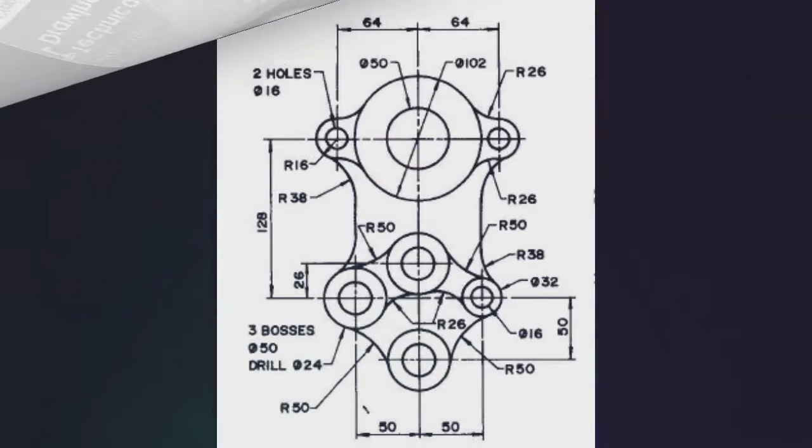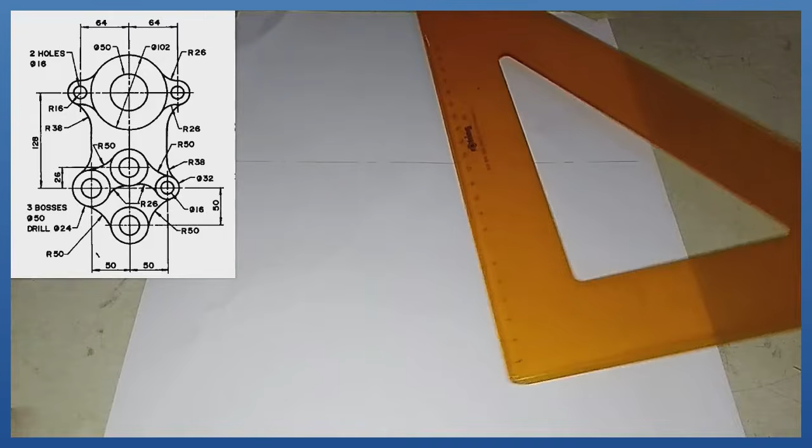Okay, so for this question, the very first thing I'm going to produce is this center line in this manner. Okay, so after producing that center line, I'm going to produce a vertical line, using the center line also. I'm going to produce that on it in this manner.

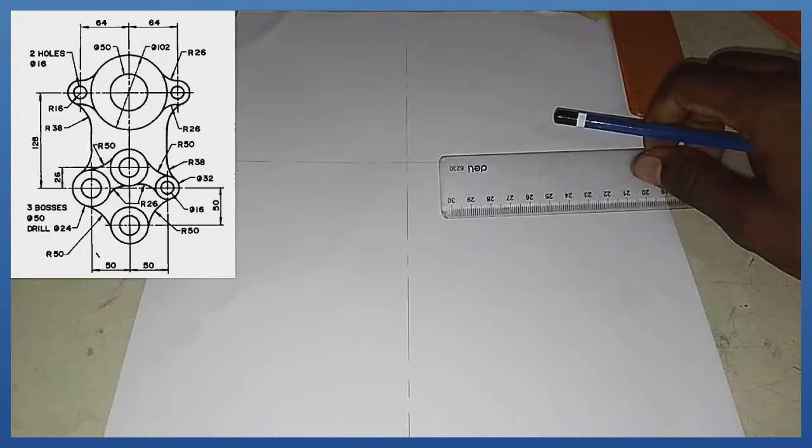Okay, after doing that, if we take note of the question on the screen, the first circle there is a circle of diameter 102, and that is radius what? Radius 51. So with radius 51 on my compass, that bigger circle, standing on this midpoint, I'm going to produce my first circle, which is this.

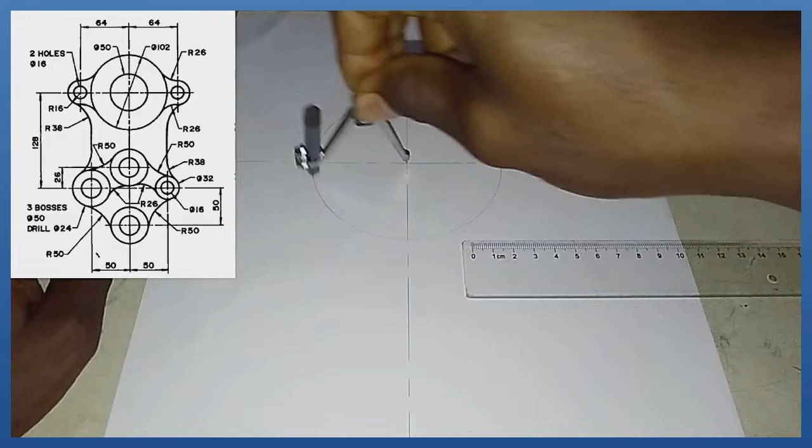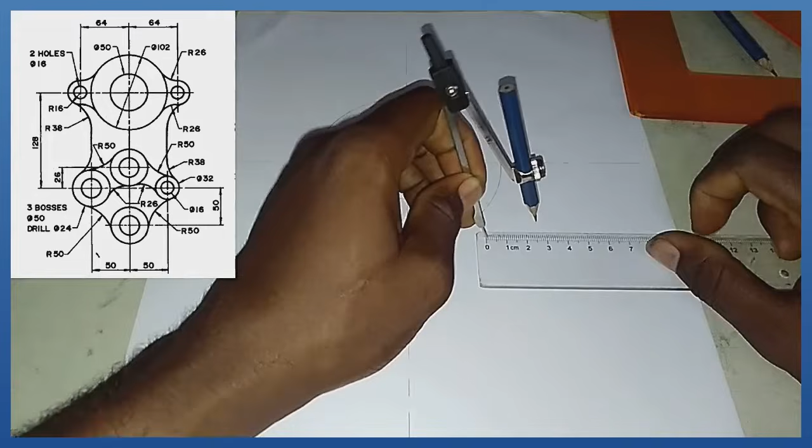Then the circle sitting inside of it is diameter 50, which is radius 25. So with radius 25, I produce this second circle right here. From the midpoint of our circle towards the left hand side and right hand side, we have a mark of length 64. So with my compass measuring 64, standing on this main point, I strike an arc like this and like this.

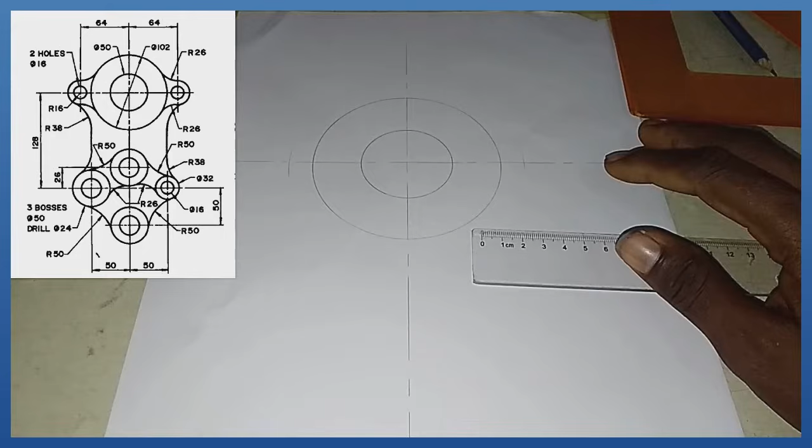So what is the next procedure? Towards my left and right hand side, first of all, I'm having a small circle of diameter 16, and that is radius 8. So with my compass measuring radius 8, it's quite small, standing at this midpoint right here, I produce this circle with radius 8, then standing right here also with radius 8, I produce.

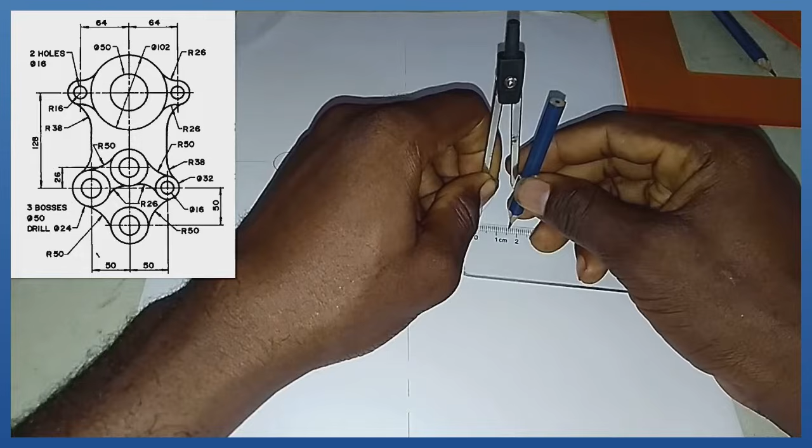Then on its outside here, I'm having a half circle of radius 16, which is this. You need to be careful with your measurement. So standing on this same midpoint, I draw in this manner. Then with the same radius 16, standing here, I draw in this manner also.

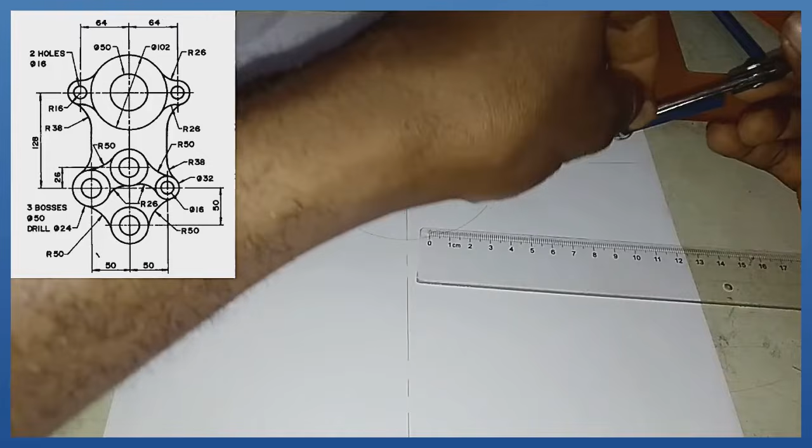If we take a very good look at the question, we have an arc joining these areas together, and that arc is of radius 26. Looking at that arc, it is an external arc. The first arc, second, third, and fourth are all external arcs. Therefore, we are applying the principle of addition. On these smaller circles, this circle is radius 16, while the arc itself is radius 26. Radius 16 plus radius 26, that is radius 42.

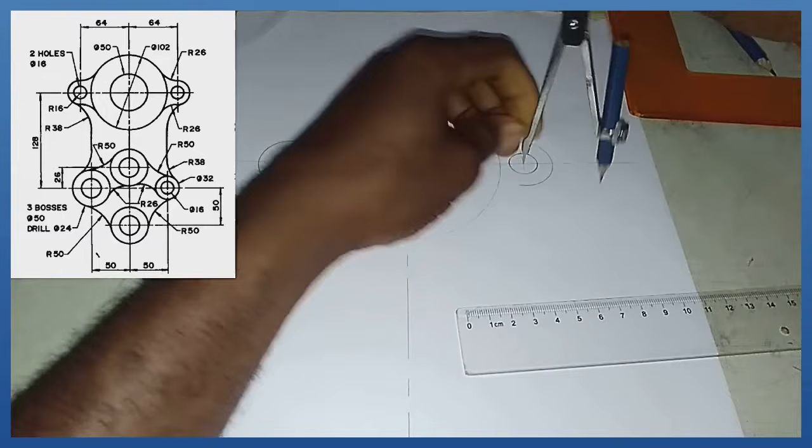So with my compass, I measure radius 42. I stand at this midpoint right here and produce this arc, 1, 2. I come to this center right here with the same radius 42 and produce this arc, 3 and 4.

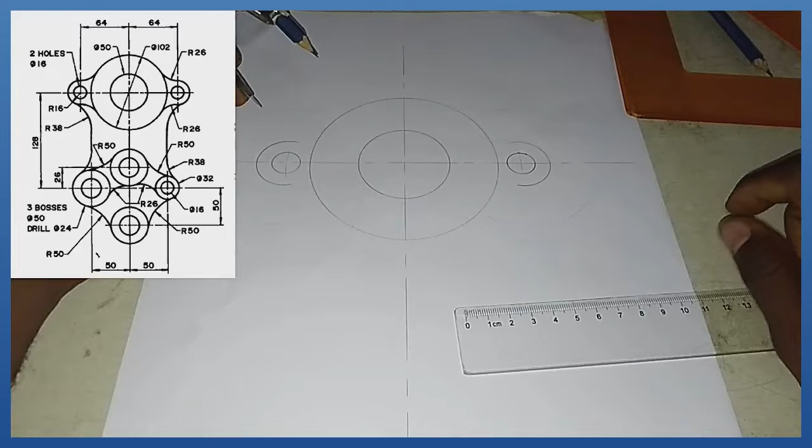This bigger circle, its radius is 51. 51 plus 26, that is 77. So with my compass, I measure radius 77. Standing at the center, I pick my first arc, second, third, and fourth, intersecting the arcs which I drew earlier on.

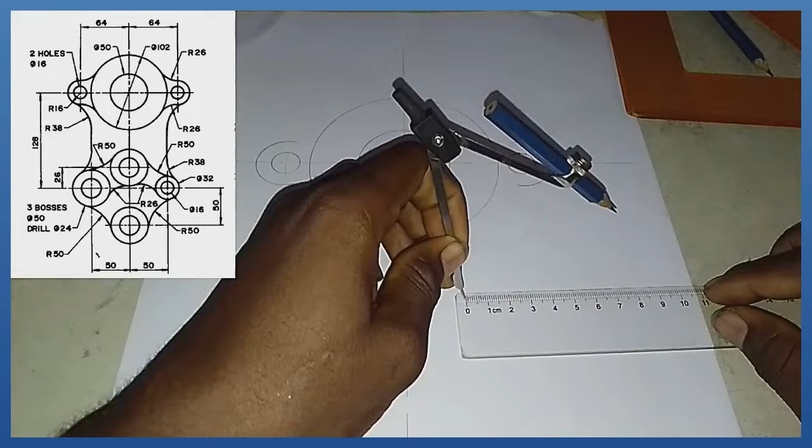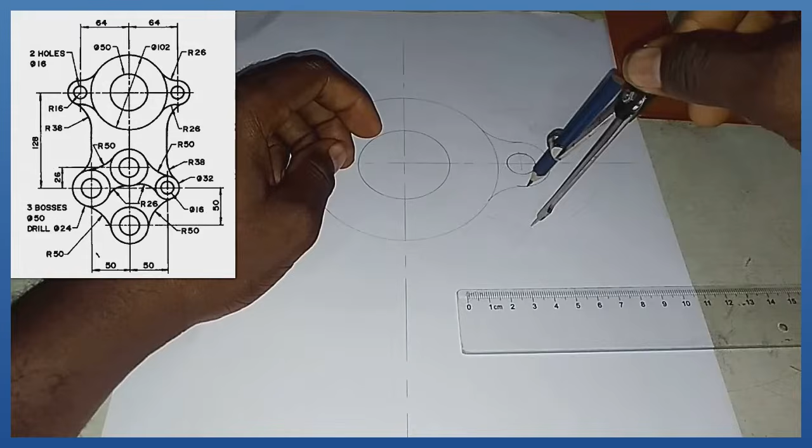Then I'm going to pick radius 26, which is the radius of that arc itself. Standing at this first point of intersection, I draw in this manner. With the same radius 26, standing at this point of intersection, I draw my second arc in this manner.

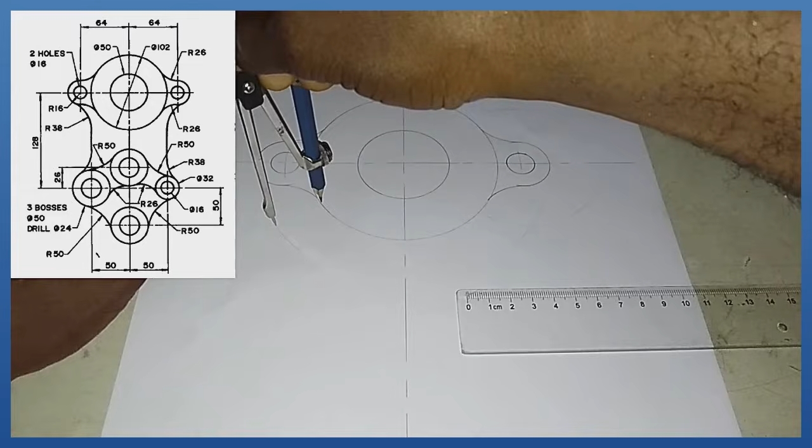With the same radius 26, standing at this third point of intersection, I draw my arc. You need to be careful. And with the same radius 26, standing at this fourth point of intersection, I draw my arc in this manner.

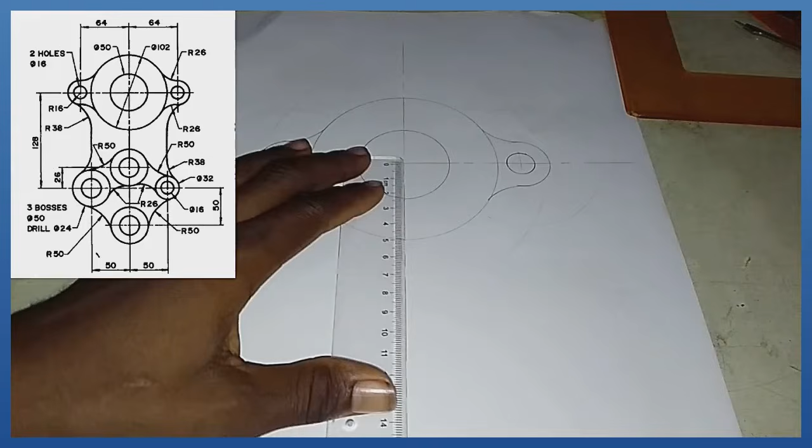So what's the next procedure? Take note that from the center of this circle towards the bottom, I'm having a height of 128. So I'm going to pick my ruler, mark 0 at the center of this circle, then a height of what?

128, which is this. That is the mark of 128. So on that mark of 128, I'm going to produce a thin horizontal line in this manner, right? Yeah, a thin horizontal line. So that is it. So what is the next thing to do? What is the next procedure?

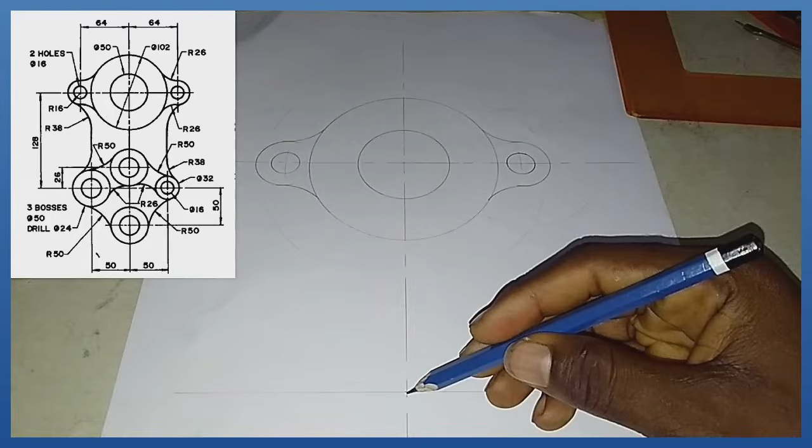Okay, so from this center, if you take note of the question on the screen, towards the top, I'm having a length of what? A length of 26. So from this midpoint, with mark 26 on my compass, I strike an arc in that manner. Then from this same midpoint to the bottom, I'm having a length of what? A length of 50. With my compass, I measure a mark of 50, which is this. Then from this midpoint, I strike that arc at the bottom.

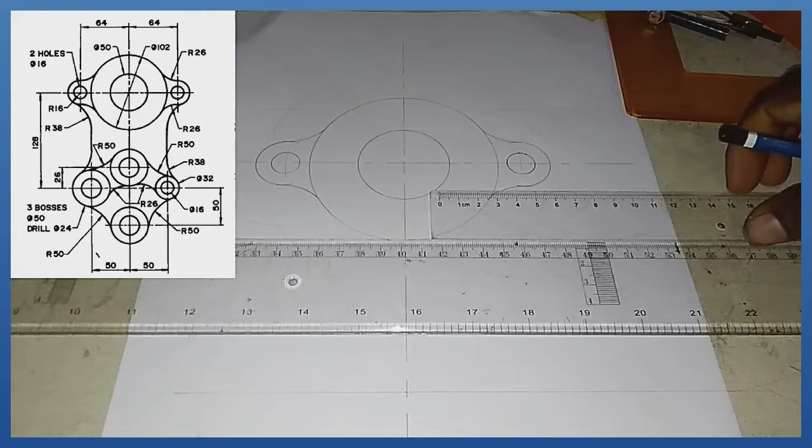Okay, so what's the next procedure? I'm going to produce horizontal lines on those points. First here, then secondly right here, thin horizontal line. And also I'm going to extend this vertical line coming from the top downward. So that is it.

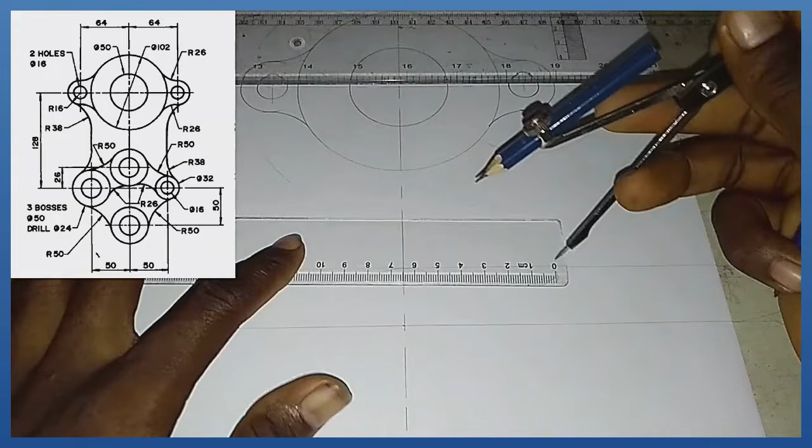So if we take note of what is on the screen, from this center line at the bottom side, we have a mark of 50 towards the left and 50 towards the right. So with my compass measuring a mark of 50, I'm going to stand right here, strike an arc right here and right here. Then at those positions where I strike the arc, I'm going to produce perpendiculars and drag them to the top in form of a center line.

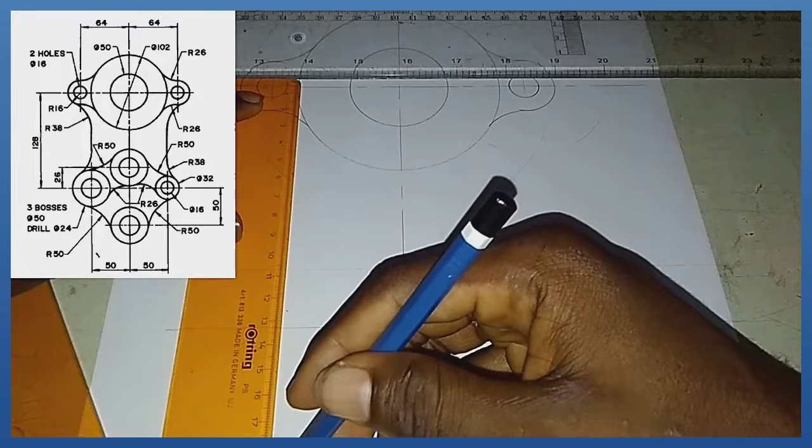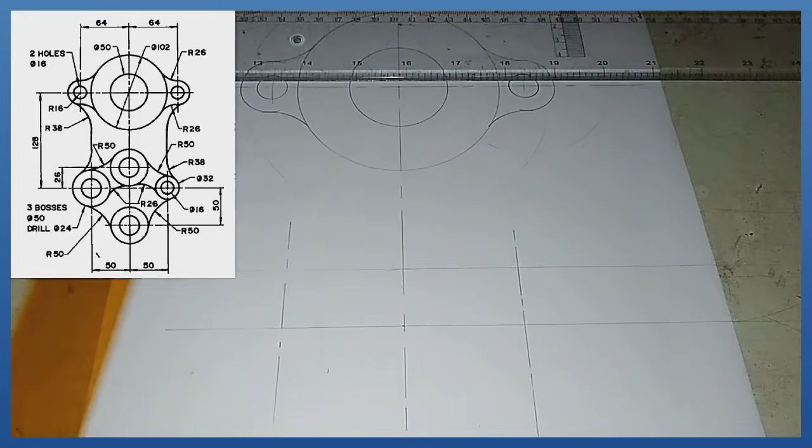So make it thin. So that's it. Then on this axis also. So as it is now, we have a midpoint right here, we have one here, and we have one here. And we're told that on this first, second, and third midpoint, we have circles. We have a bigger circle and an internal circle inside of them.

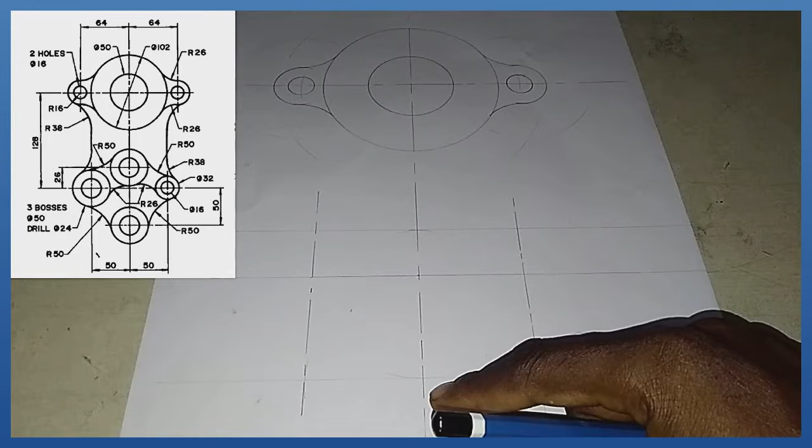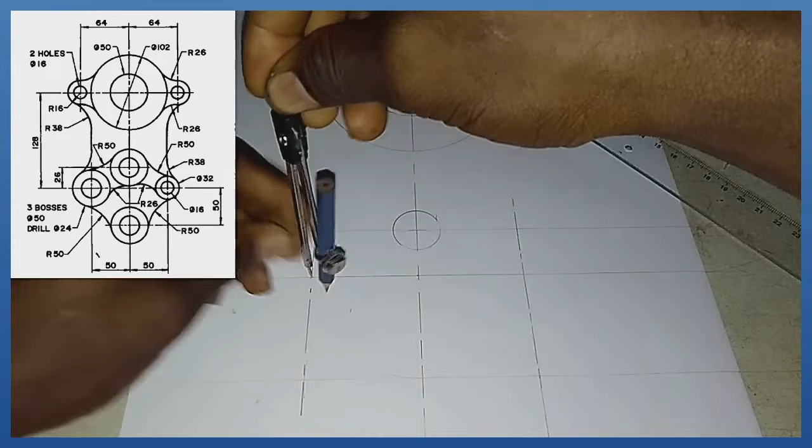For the internal circles, we are told that their diameter is 24, so their radius will be 12. So picking my compass, measuring a radius of 12, I stand right here and produce this first circle. With the same radius 12, I come down here and produce this circle. With the same radius 12, I come down here and produce this circle.

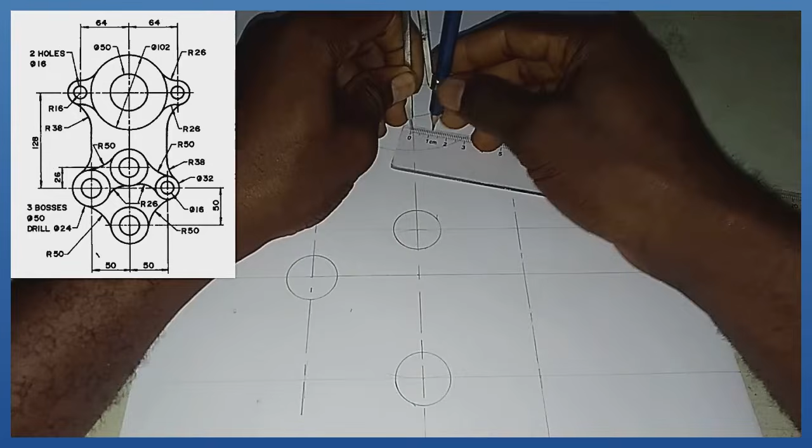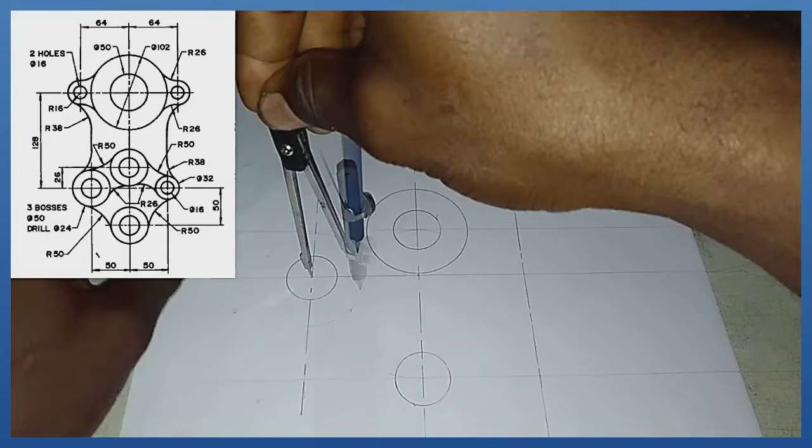Then for the bigger circles, their diameter is 50, which carries a radius of 25. So with radius 25 on my compass, standing at this first midpoint, I produce this big circle of radius 25. Coming here with radius 25, I produce this second circle. Coming down here, I produce this third circle of radius 25, as you can see on the screen.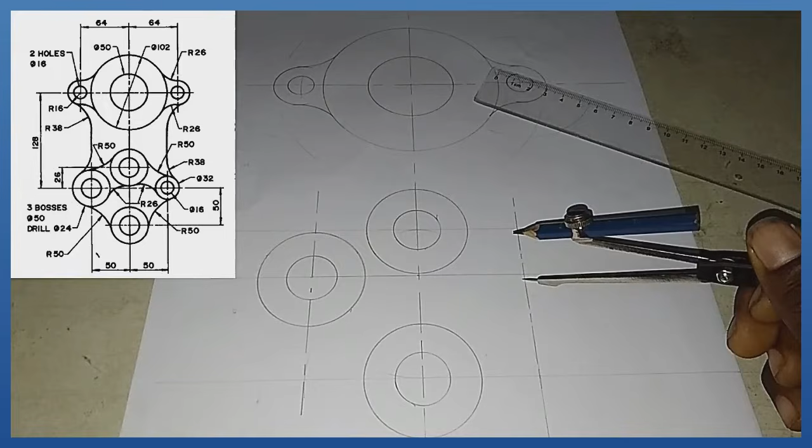That being settled, on this fourth midpoint we were told that we have two circles also. The one inside is diameter 16, which is radius 8. So with my compass and my ruler, I measure a radius of 8. Then standing right here, I produce that first circle with radius 8.

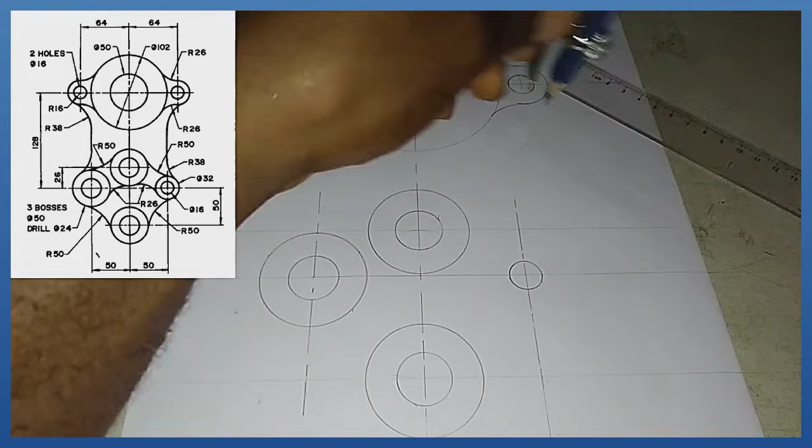And we're told that the bigger circle there is diameter 32, which is radius 16. So with my compass and my ruler, I measure 16. Standing right here, I produce that second circle, which is what you are seeing on the screen.

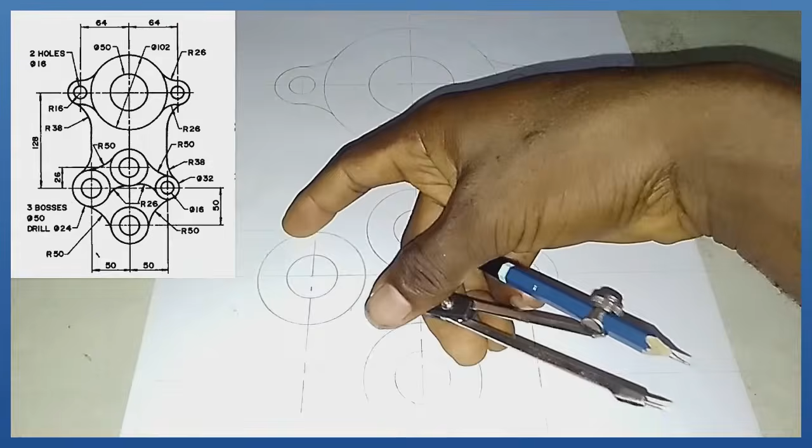Now back to the real business. You take note that we have an arc here, 1, and the second arc here, 2. The arc here is radius 50. The arc here is also radius 50. And since these three circles are of the same dimension, even the arc in this area is radius 50. And even in this fourth part, the arc is radius 50. But let's focus on the arc here and the arc here first of all.

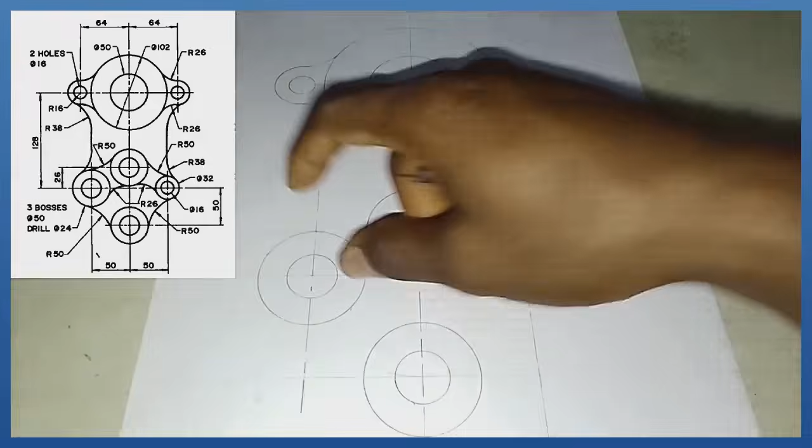The radius of our circle here is 25. So 25 plus 50 is 75. So with my compass, I measure radius 75, which is what I'm having right there. Then placing my compass right here, I strike this arc 1.

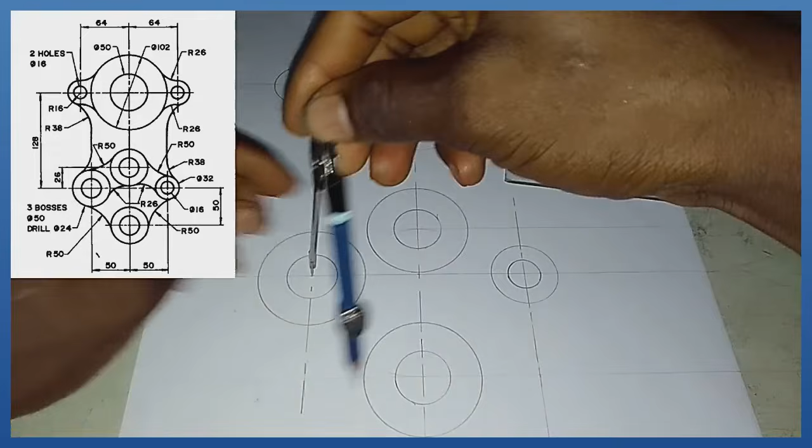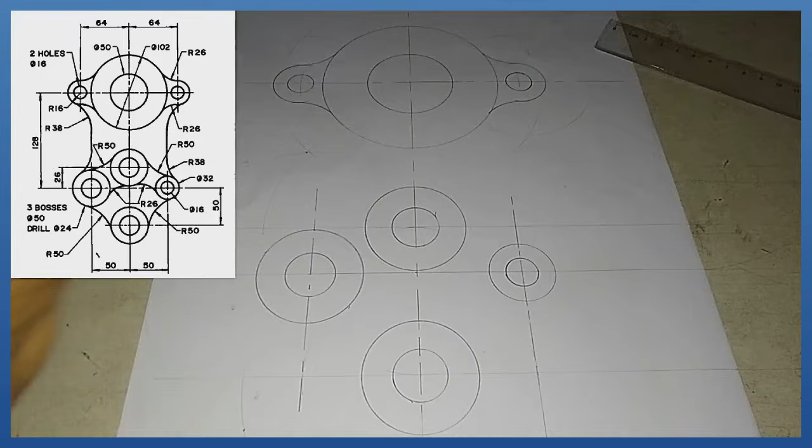Okay, standing right here, I strike an arc at the bottom here. So I'm having an intersection here right now, my first intersection. Then with the same radius 75, standing right here, I draw another arc. So I'm having another intersection here, making two. So instead of giving myself unnecessary headache, with that same radius 75, since I'm still going to do an addition here, come here, strike an arc of radius 75 towards this direction also. Then come here, strike an arc of radius 75 towards this direction also.

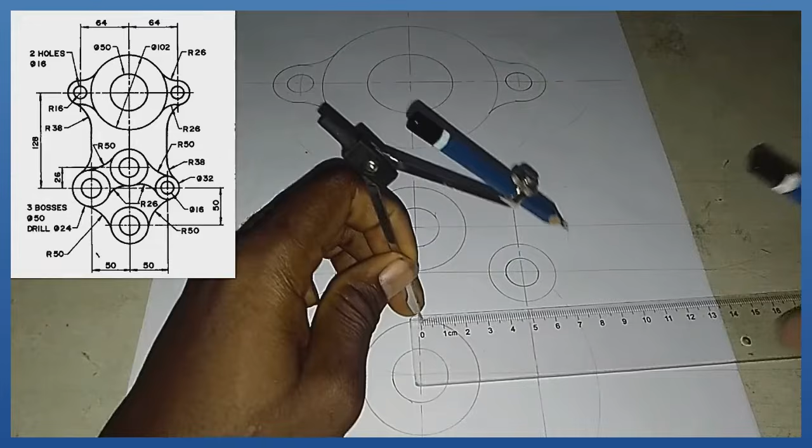Okay, now back to this area. The next procedure is to pick my compass and measure radius 50, which is this. So with my radius 50, standing at this point of intersection right here, I'm going to draw the arc, which is what you are seeing on the screen right now. That is an external arc. With the same radius 50, standing at this intersection right here, I'm going to, hey, you need to be careful, draw the second arc, which is what you are seeing on the screen right now.

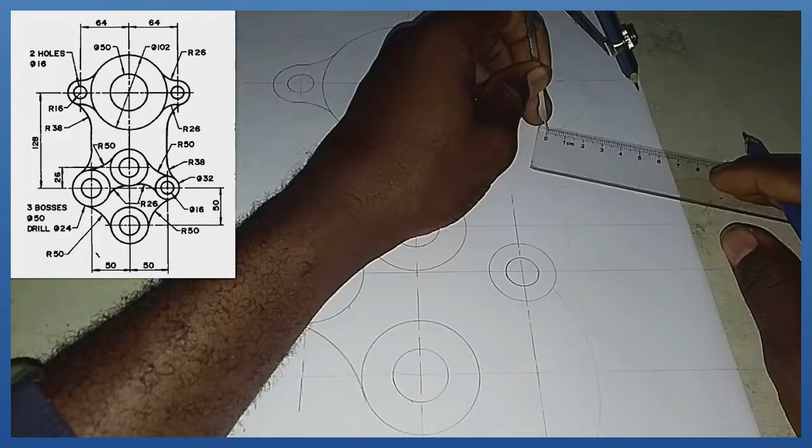All right, so these ones are also arcs of radius 50, but mind you, the radius of this circle here is radius 16. So 50 plus 16, that is 66. Pick your compass, measure radius 66, which is what I'm having right here. With radius 66, placing my compass right here, I strike this arc right here, then I strike this arc right here. Therefore, I'm having this intersection here and this intersection right here.

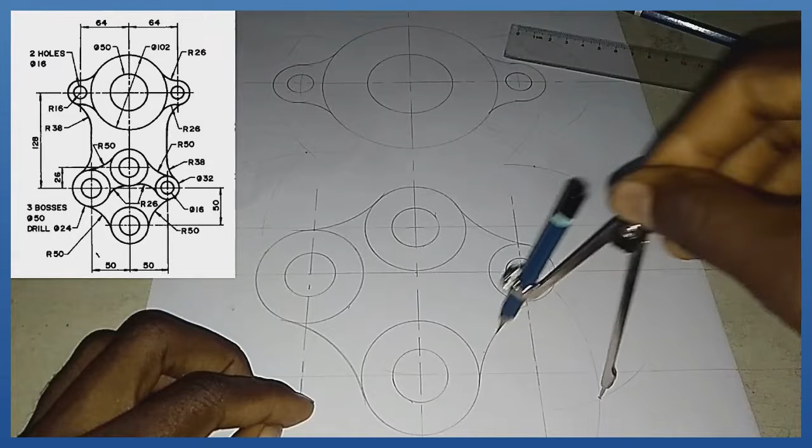So the next procedure is pick my compass and measure radius 50. With radius 50 on my compass, at this intersection right here, I draw this arc, as you can see on the screen. Then at this intersection right here, with the same radius 50, I draw this second arc, as you can see on the screen. Okay, so that is settled. It looks simple, isn't it? That's just the beauty if you understand the principles.

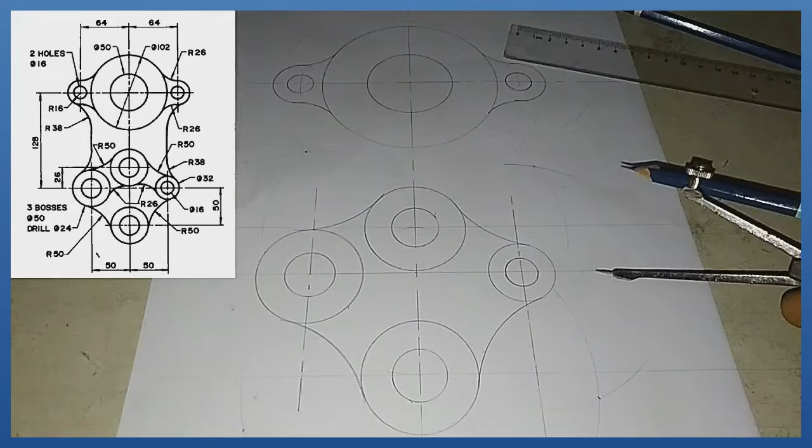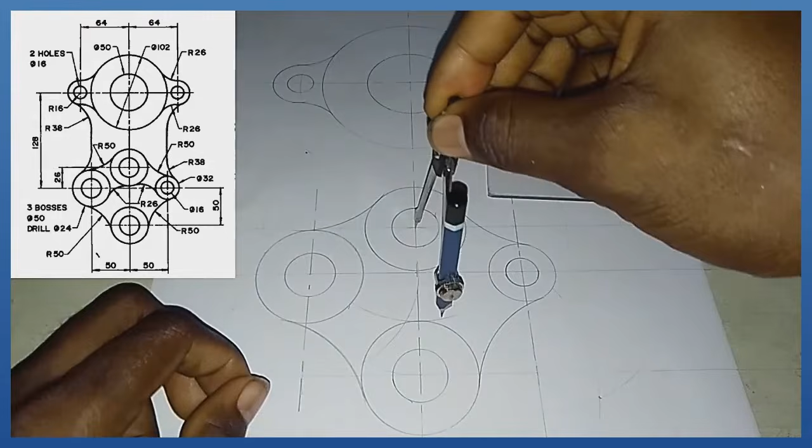All right, so now let's draw the arcs on the inside. Right here we have an arc on the inside, and another arc on the inside here. We are told that the arcs on the inside are of radius 26. Let's draw this first. This arc is also an external arc. Radius 26 plus radius 25, that is radius 51. With my compass, I measure radius 51. Standing at this midpoint, I strike an arc in this manner. With the same radius 51, standing here, I strike another arc. I'm going to need an arc of radius 51 towards this area, so let me strike it once and for all in extension like that.

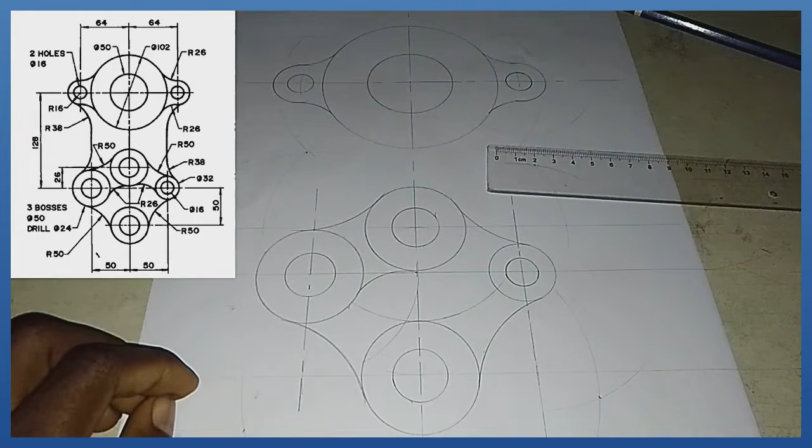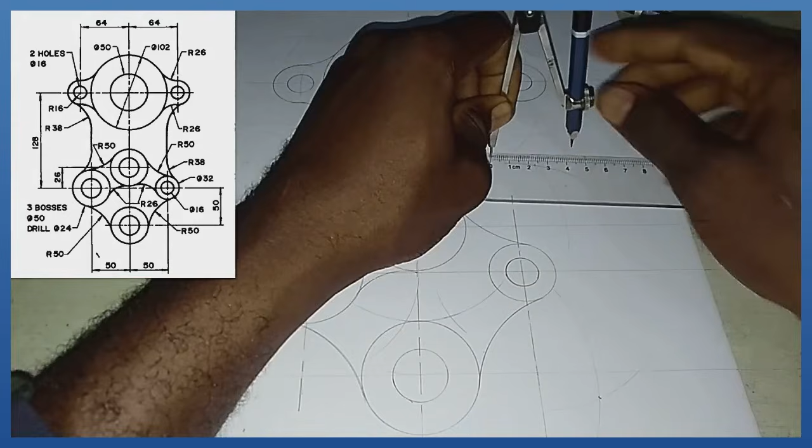Now back. Pick my compass, measure radius 26, come to this point of intersection right here, then join, as you can see. So that is settled. For this area here, radius 26 plus radius 16, that is radius 42. With my compass, I measure radius 42. Then standing at this midpoint with radius 42, I strike my corresponding arc, which is right here. From that junction, I pick my radius 26 on my compass. Then from this point of intersection, I draw my arc. So that is my arc of radius 26 also.

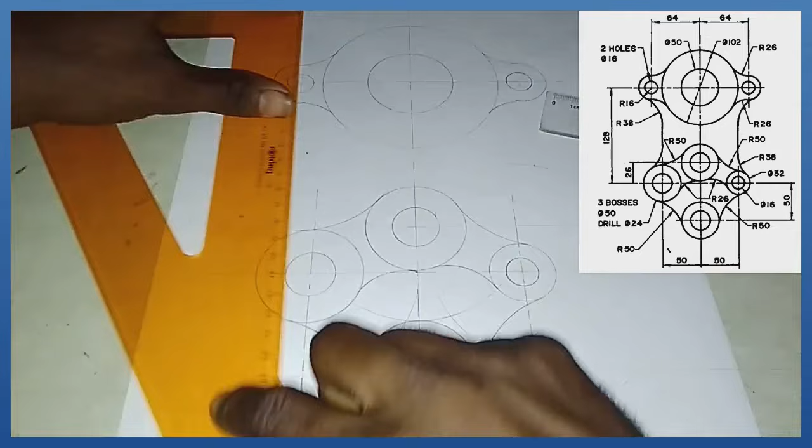Now we are almost done. What's left is to link this area to this area here. So how do we do that? Take note of this. You will notice that from this center, the line linking this area and this area together is from this midpoint and this midpoint here. So pick your set square and T-square, align it to this midpoint, and produce a thin horizontal line like this. Then align it to this midpoint also and produce a thin horizontal line in that manner. Do we have it there now? Yes.

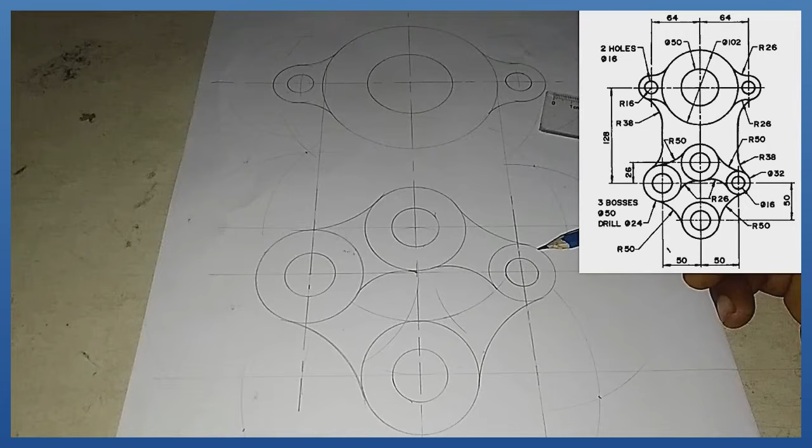Now let's go back to business. The radius of the arc linking this line to this area here is radius 38. So what am I going to do? I'm going to pick my compass and measure radius 38 like this. Can you see?

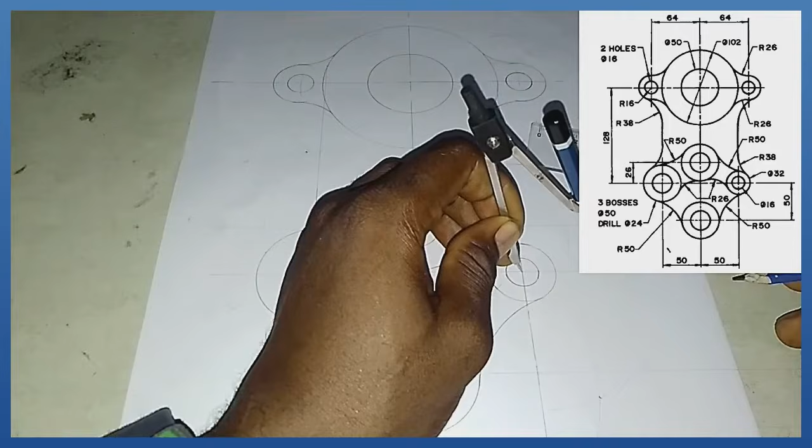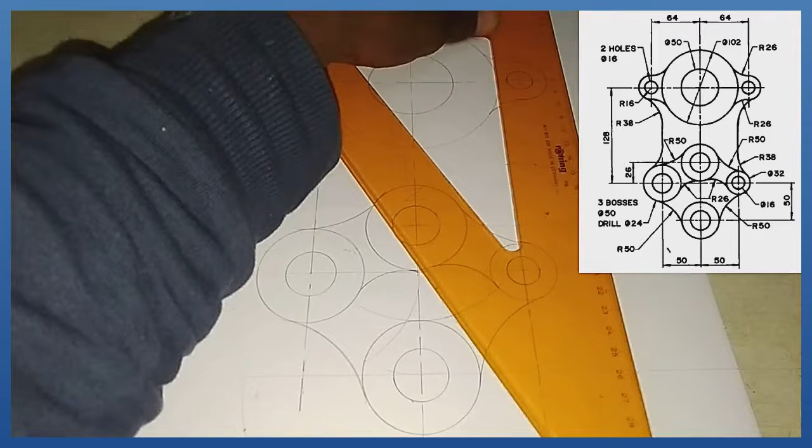With radius 38 on my compass, since this line aligns to the midpoint, from this midpoint I'm measuring a mark of 38 outside here. On that mark of 38, I'm going to produce a perpendicular towards the top, like this. Just take note, this is the line of 38, a perpendicular in this manner, already drawn. So the distance between this line and this straight line is 38.

What is the next procedure? This arc of radius 38 is external. You remember that this circle is circle of radius 16. Therefore, 38 plus 16 is 54.

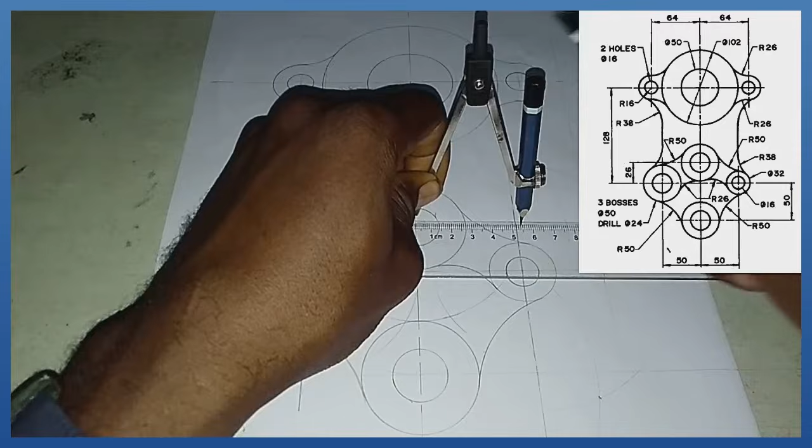Pick your compass, measure radius 54, which is this. With radius 54, standing at this midpoint, I strike an arc. The arc intersects the vertical line here at this junction. So what's the next procedure? Pick my compass and measure radius 38, which is this. With my radius 38, from this junction right here, I draw.

As you can see on the screen, I draw. Can you see? Do you take note of that? So that is it over there. Right here also we are having an arc of radius 38. Since the line from here to here is the same thing, look at the question on the screen. It still aligns, it's still the same straight line that this arc is going to sit on. So from here to here is already 38.

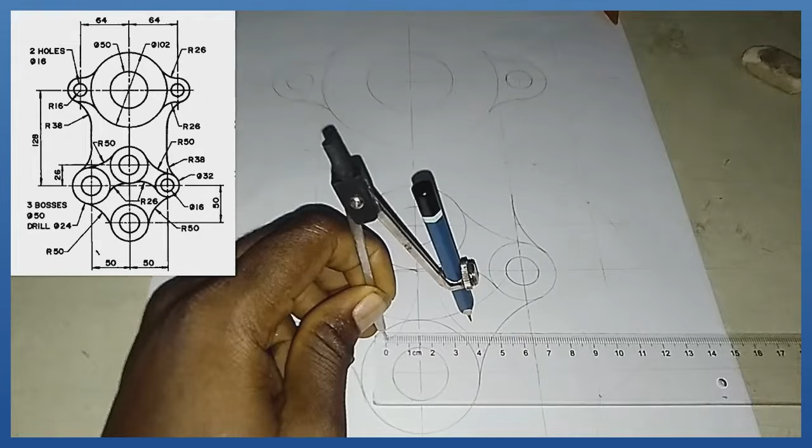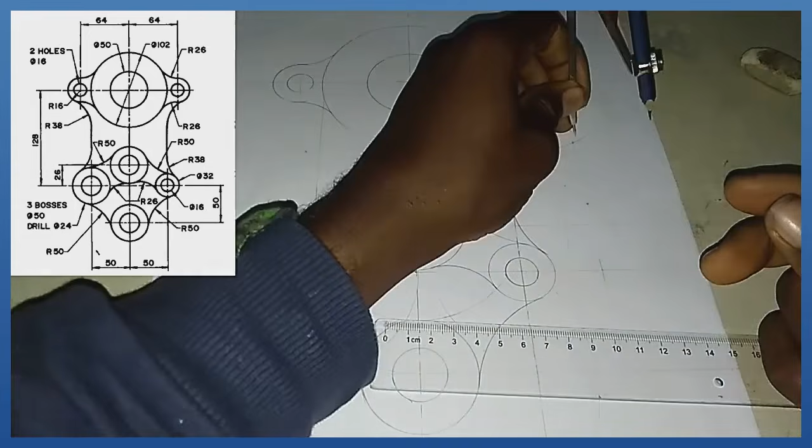The next procedure is radius 38 plus radius 16, that is 54. Pick your compass and measure radius 54, which is this. With radius 54, from this midpoint, I strike my arc in this manner. Can you see? This is the point of intersection. At that point of intersection, with radius 38 measured on my compass, standing at this point of intersection, I'm going to draw.

Can you see? I'm going to draw, so that is it on the screen. After drawing, I'm going to link the 2 points together tangentially with my ruler. So that is it, settled, right?

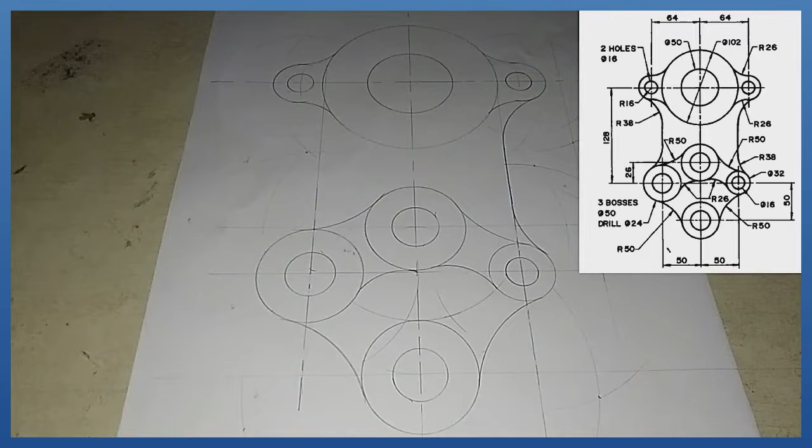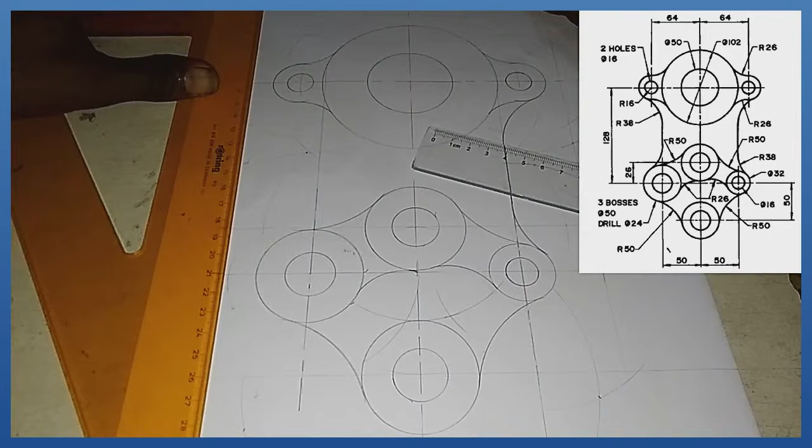Moving to this other side here, the radius of the arc there is also radius 38, and we already have this straight line there. So the next procedure: pick my ruler, measure radius 38, which is this. Stand at this center here, strike an arc of radius 38 towards the outside, as you can see on the screen, then project it vertically with a thin line to the top, in this manner.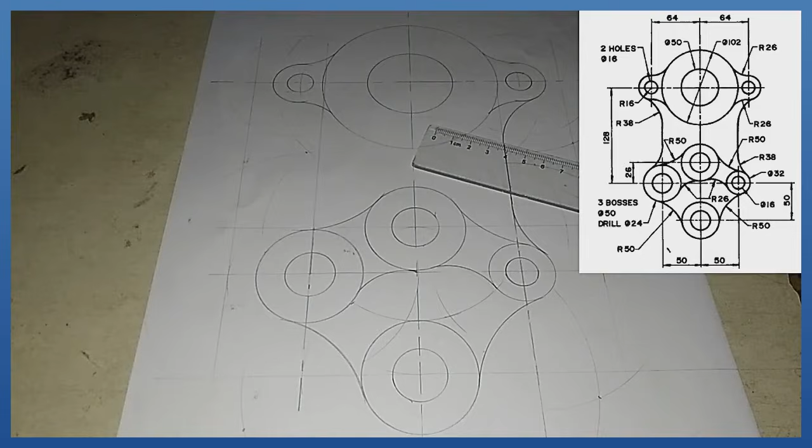So the distance of this line from here to here is 38, that is what it actually implies over there. Since the distance between this line and this is 38, and the radius for this circle is 25, and remember this arc is also an external arc. So radius 25 plus radius 38 is radius 63.

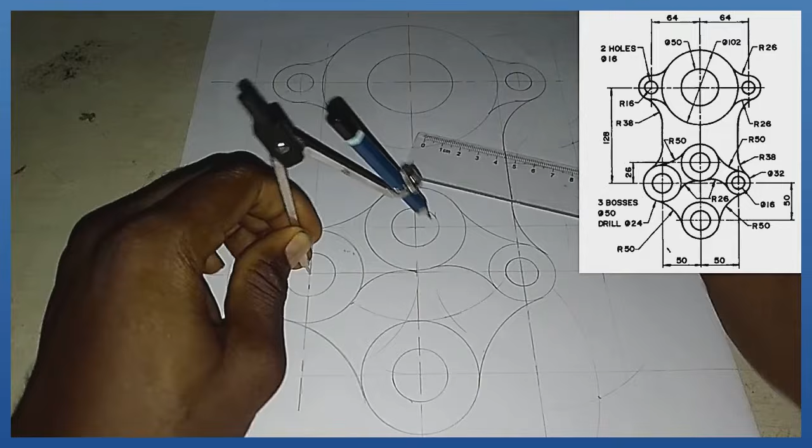With my compass, I measure radius 63, which is what I'm having right here. With radius 63 on my compass, standing at this midpoint here, I strike this arc in this manner, so my arc intersects this vertical line right here.

Then I'm going to measure radius 38, which is this. With my radius 38 coming down here, I'm going to draw that arc, as you can see, right? So that is the arc right there.

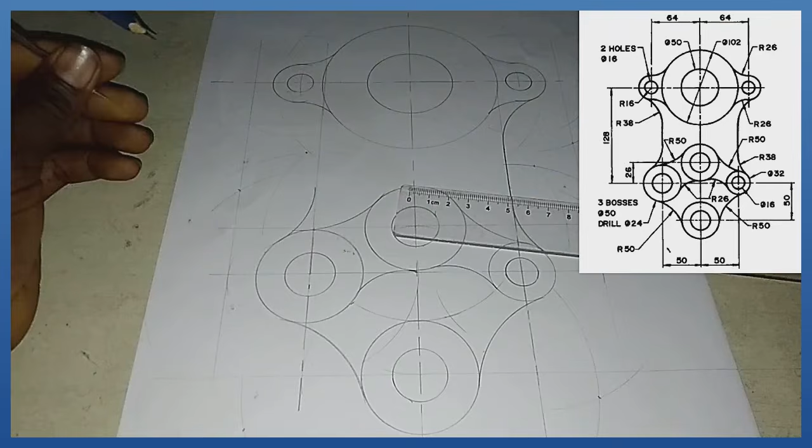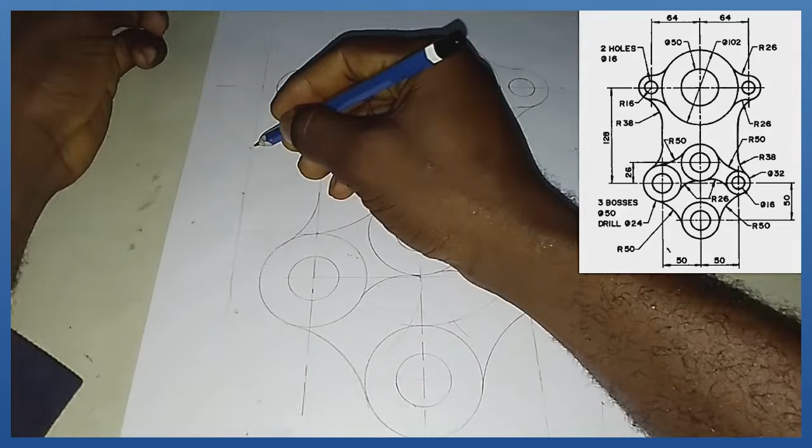Towards the top here, we already have the vertical line, and this is 64. Since here to here is still 38, 38 plus radius 16 is 54. With 54 on my compass, standing at this midpoint, I'm striking this arc right here. So my arc touches the straight line at this junction where I dotted there.

So then I'm going to pick my compass and measure radius 38, which is this. With my radius 38 from this junction, I'm going to draw, as you can see on the screen right there. I draw.

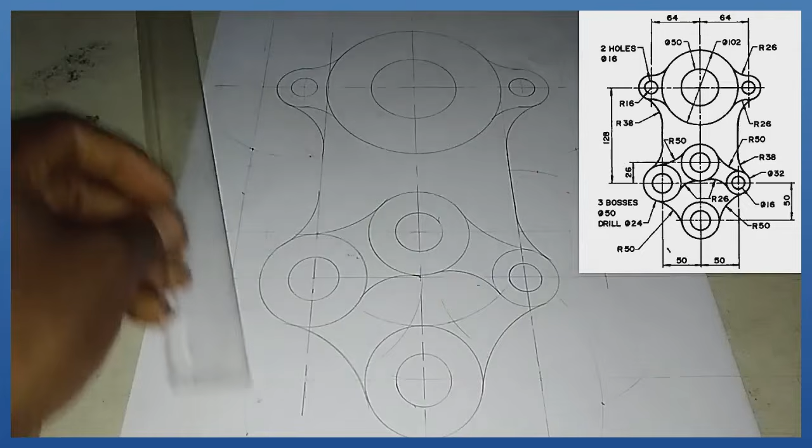So then I'm going to join the 2 points together tangentially in this manner, yeah, in that manner. That is the solution to that very question on the screen. You can just put the dimension, for instance, now this area for now. Actually, this is enough as it is. So that is the solution to this very problem, that is the solution to that problem.